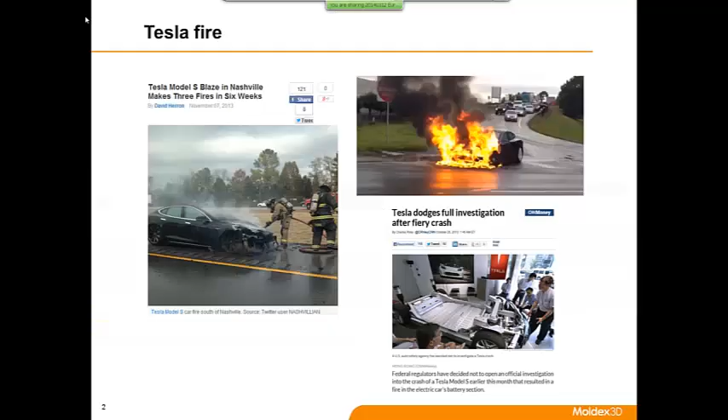So this pretty much happened at the end of last year, 2013, and we see a lot of accidents happen in this kind of advanced vehicle system, pretty much using fuel cells or batteries. So these cars are really advanced and state-of-the-art, and a lot of things are still not fully tested. Like these two fires, they happened where there's a puncture on the road.

So the falling object from the previous car just punctured through the cell module, causing the whole cell modules to heat up and cause fire. So these are a lot of things that are kind of hard to predict in advance, and to design some mechanism around that particular important area.

So above all, there is increasingly a lot of usage of plastics in this kind of vehicle due to the fuel economy constraint. So last year, we were working with GM to find out how to improve the safety of the car. This is one of the examples showing a battery module. This is the Chevy Volt, and the battery module is shown on the top right corner. On the bottom, you see a picture showing the battery frame.

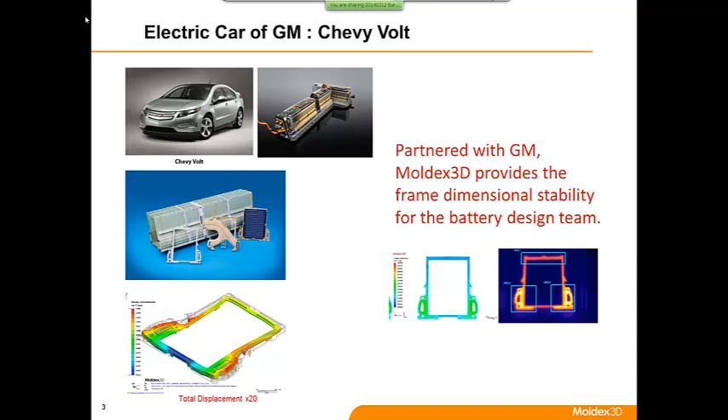This is really crucial because these areas happen to be where the coolant fluid is running through to cool down the battery module. So any deviation from the spec in dimensional stability is really important. So this is one of the benefits Moldex3D can offer in designing such crucial and advanced power systems.

So like these battery modules, when designing this kind of power system, designers have to have something in their mind beforehand. How am I going to make this kind of coolant system? Do I use plastics or metals? If I choose plastics, what might go wrong?

So for Moldex3D, what we try to do is start to evaluate this kind of design at a very early concept stage. Whether you are surveying the materials, staying with polypropylene plus glass fiber, or there might be some needs on the temperature so you have to switch to nylon, you can easily use the software to compare between the materials. What are their processing temperature range? What's their thermal stability range?

All these things can be thought about from the simulation point of view at a very early stage. So next we can move on to part engineering. There's a lot of design validation that needs to be done at this stage, starting from the concept stage. Right now a lot of structural components, under-the-hood components, and even the bumpers use a lot of fiber reinforced materials. If you have fiber involved, there are always anisotropic properties.

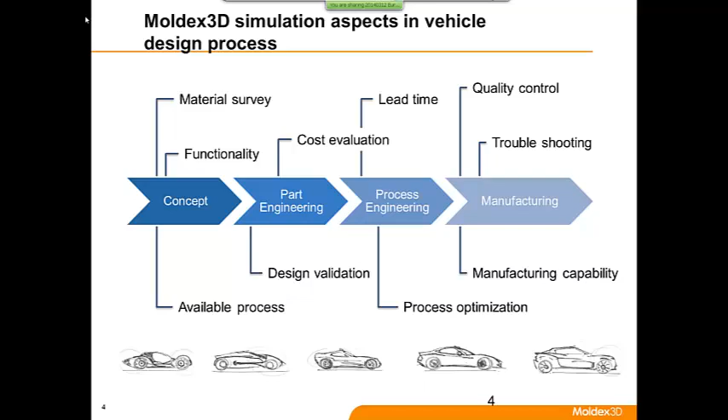So there are a lot of very realistic problems happening every day. How do I optimize the process condition? What kind of defect will I encounter? How to do troubleshooting? So Moldex3D can cover pretty much the whole range, starting from concept up to manufacturing, all the way inside this vehicle design cycle.

So in order to fit in the cycle, we partner with a lot of softwares. For the design stage, we partner with Siemens, PTC, and Dassault. So there are a lot of ways for data exchange and use of the CAD file. For example, we can have an embedded user interface directly inside this software. Also, we have other kinds of modules that can do seamless integration. So switching the data from your CAD file to Moldex3D is very easy.

Or Moldex3D can work as a standalone module. So everything you need to talk between the CAD file and Moldex3D is just a neutral file format, like an STL file. So this makes plastic processing, design and validation, and mold design very easy using Moldex3D.

So after the design stage has been done, we move to the engineering stage. So a lot of these process-induced defects or anisotropy can easily be output from Moldex3D and fed into the software. So whether you are using ANSYS, Simulia, MSC Nastran, or Marc, or Digimat, or if you want to do dynamic testing in LS-DYNA, it's all possible.

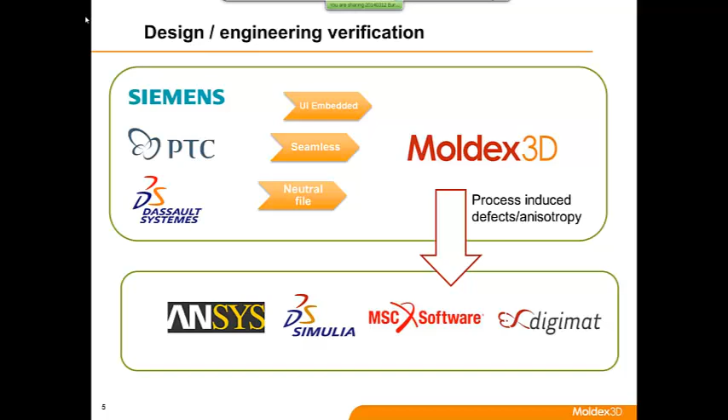And today's talk is the beginning of a series of talks. So we planned, in the following 3 months, maybe 3 consecutive talks, we will cover all these different components. So for the next talk, we will talk a little bit about interior, exterior, and optical. These components rely a lot on cost reduction and quality improvement.

And the second one, we'll be talking about body and structural. So we will see a lot of examples showing how to do structural analysis, and how to use Moldex3D's information and send it into your engineering design tools. And the third talk will be about components under the hood, or electrical components and fuel components, which relate to safety and reliability. So you will see some of the functions that Moldex3D can do to evaluate the longevity of this kind of product.

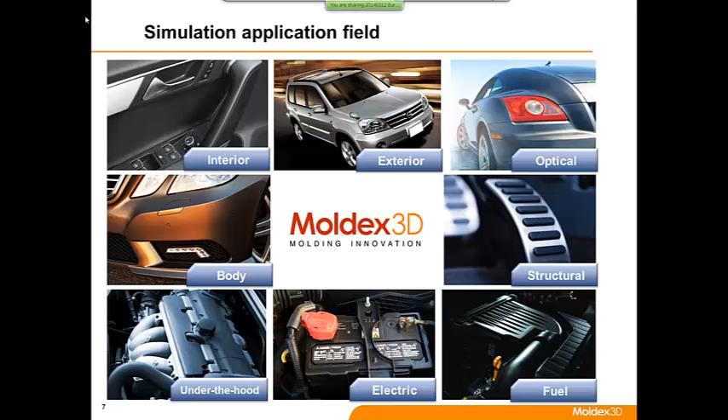So this year we pretty much grouped our modules into providing our customers different automotive solutions. So the first thing we care about is quality and cost. Later on you will see examples showing how to use Moldex3D to improve product quality. The second one is about safety and performance. And the third one is about the lightweight future.

So starting from the BMW i3, people already have a lot of knowledge about what a carbon fiber frame can do in the future, because lightweight will be the undeniable future, of course, but how to make it fast, make it feasible, what are the processes that can be done, right now people are all experimenting, OEMs are finding ways to do that. And Moldex3D is keeping up with this trend. So we also test in our software a lot of different lightweight process capabilities, so we can also have those solutions for our customers.

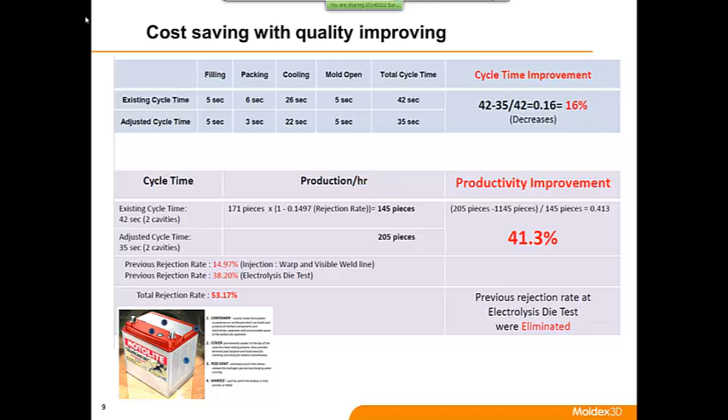And before, they even needed to spend some time and money on the electrolysis die test to see if there are any leakages because of the poor quality. But right now, since the yield is high and the quality has improved, they don't even need that test anymore. So they can dump this, so they can save even more money out of that. So from this example, you can easily see what kind of benefit mold filling simulation can do when designing or manufacturing automotive components.

So speaking of quality, there are 3 major things that people care about. It's the warpage, weld line, and sink mark. So today we won't be covering all 3 of them. We will save it for our next talk, which is sometime during April, and we will let you guys know the exact date after this seminar. But today we can take a look at how Moldex3D can deal with weld line problems.

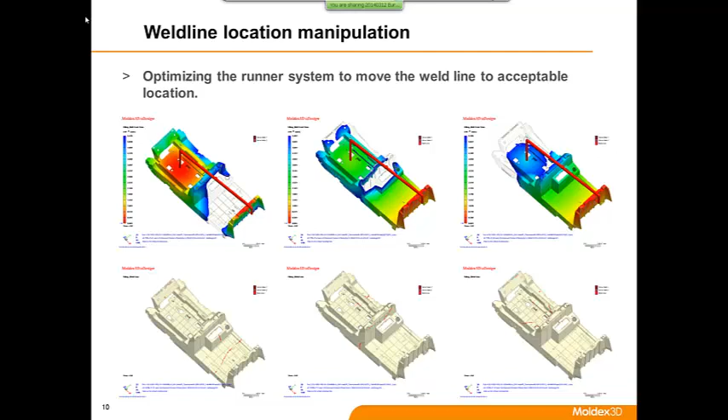And further down the road, we can even scatter this around further. So you can see from the bottom right corner, you almost see no straight consecutive line. Everything is pretty much scattered. So this benefits the structural integrity, and also benefits the appearance.

So this is another example, because sometimes in the real case the mold has been fixed, the part design has been fixed. It's limited; you cannot change too much on the gate location. So what can you do? We can still make a lot of adjustments just based on some tiny features or not so important features in the part. For example, for this handle lid, it's the back side of the part where we are doing a lot of changing, either on the boss shape or on the thickness.

And what we're trying to do basically is to change it. If you see the right side of the picture, you can see the red line and the blue line. There used to be a visible weld line near that location, but through the manipulation of the thickness and the shape of some features, we can change the speed of the red and the blue melt front advancement. So by changing that, we can move the weld line into a less visible place, and maybe by changing the welding angle, we can shorten the weld line as well.

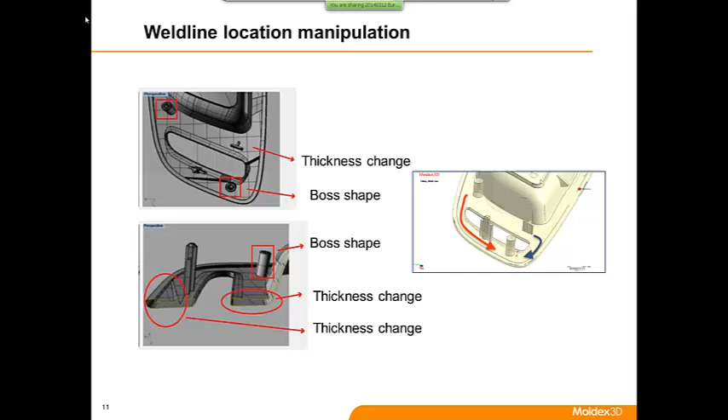So this is something you can also do even if your design has been fixed and there's not much you can do about the geometry, but still you can change some of the tiny mold features to erase the weld line.

This is another example showing that using different gates we can test the gate design. So this is a front grille, and you can see from these 4 different designs we can have a lot of different combinations of the weld lines. And not only the location, we can also estimate the weld line temperature.

So for location, of course, we want it to be in a less visible place, but if the weld line temperature is too low, it's still doing a lot of damage to the structure. But if we can also raise the weld line temperature by making the 2 melt fronts hotter than before, we still have a very strong joint in between and make them less visible.

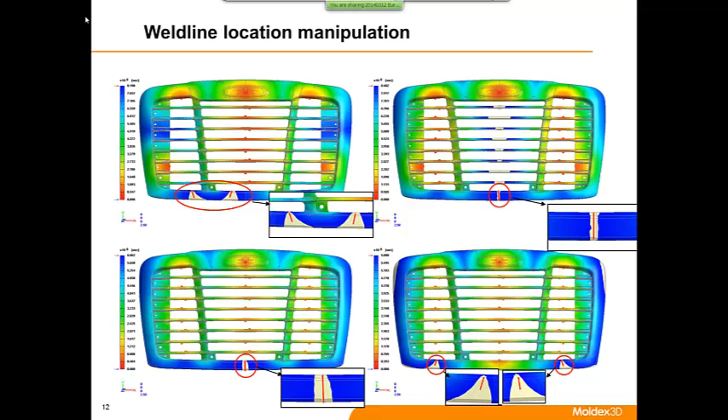So if we're using fiber, weld line location will cause another problem. So this is showing one of the examples of what Moldex3D can predict about fibers. And in Moldex3D, we are really proud of our unique fiber orientation estimation theories. So we put a lot of effort into predicting this kind of anisotropic behavior, almost really close to reality.

So you can see this melt front is coming from left and right. There's a weld line in the center. Near that weld line location, the fiber is basically not following the flow direction, but perpendicular to that. So this creates a problem.

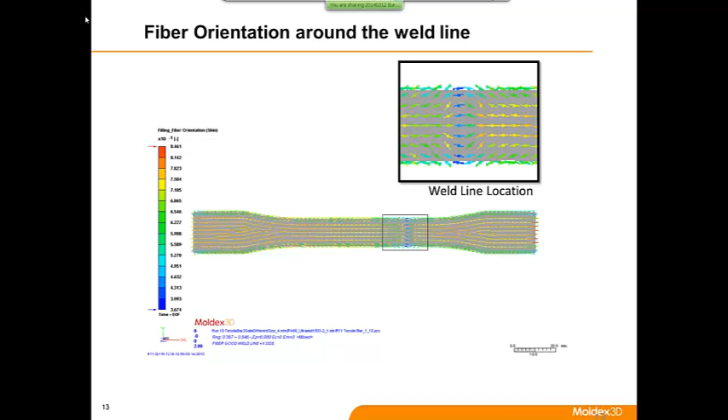For example, we can also show from this chart: the green lines, the vectors, suggest the fiber orientation. And the melt front is going from the right-hand side, passing through that circle and joins on the left-hand side. You can see the fibers align almost in parallel. So at that weld line location, no fiber is crossing the weld line. So this creates a very weak area over here. And what makes it worse is this always happens surrounding the hole.

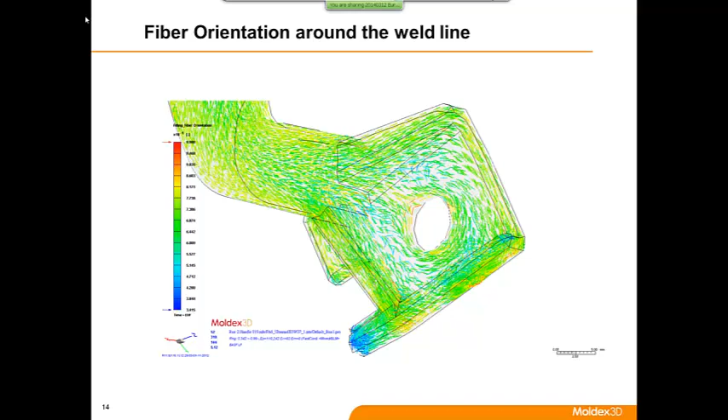So if you are doing some structural analysis, if you don't take this kind of anisotropy into consideration, you will falsely overpredict the strength of your part. But through this kind of simulation, later on you'll find out you actually did have a weak spot surrounding that circle. That's due to the fiber orientation.

So back to the tensile testing. You can see without considering the fiber orientation, which is shown on the top, the stress distribution is uniform. There's no stress concentrated region. But in reality, there's a weld line in the center, so you can see there's a really high concentrated area showing an 80 megapascal stress over that region. So we can say that without considering this kind of anisotropy, you will have limitations getting your structural simulation correct.

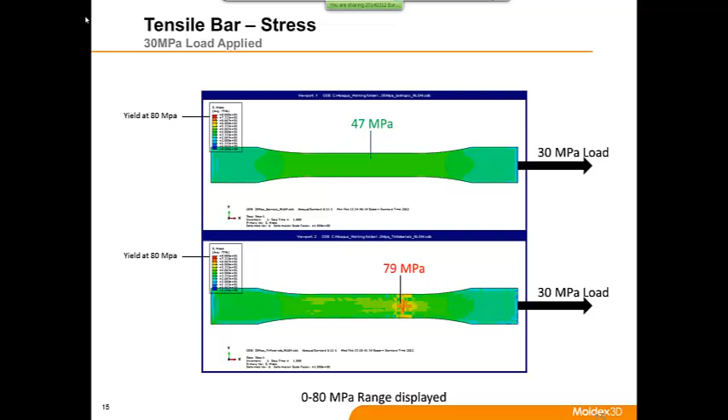So there are a lot of ways, of course, to get rid of weld lines. This is showing one of the examples that Moldex3D can predict. This is a hot runner sequential gating that's been used a lot to erase the weld line. And in Moldex3D, we have this unique feature of showing the particle tracer. So you can see on the left-hand side, this hot runner opens first. So you can follow all the particles and make estimations as it passes through your second inlet location.

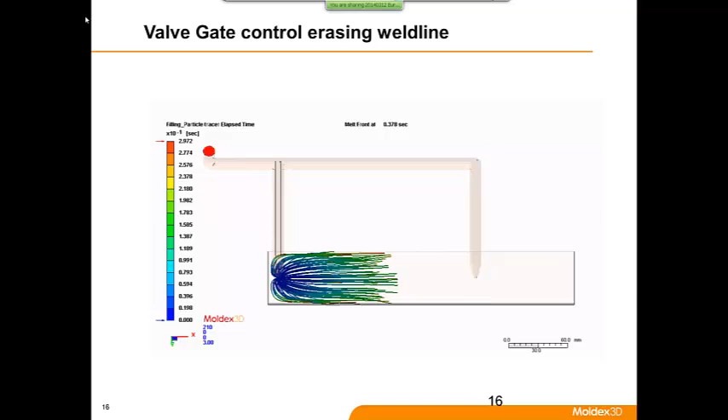So this helps the designers a lot in designing what kind of gate sequence they should use. How do I know if the first melt front has already passed the second one? Right now, of course, a lot of hot runner makers will insert a lot of sensors so they can predict when the first melt goes past the second.

But during the design stage, when designing how many hot runners you are using, do you really need a gate-controllable hot runner? So this is a very good tool, based on your geometry and your actual melt flow, to define how many hot runners and how much you're going to spend in this investment.

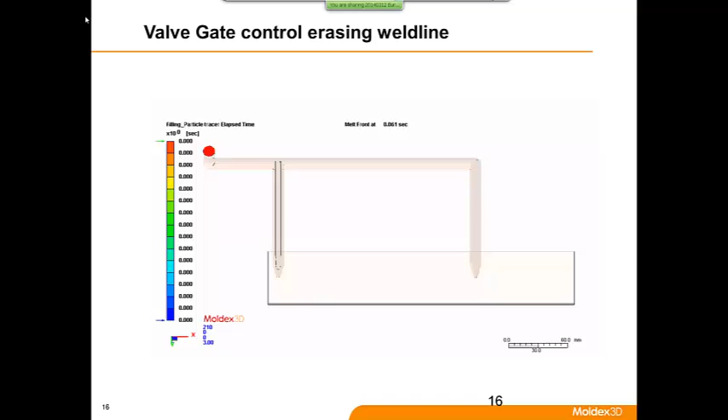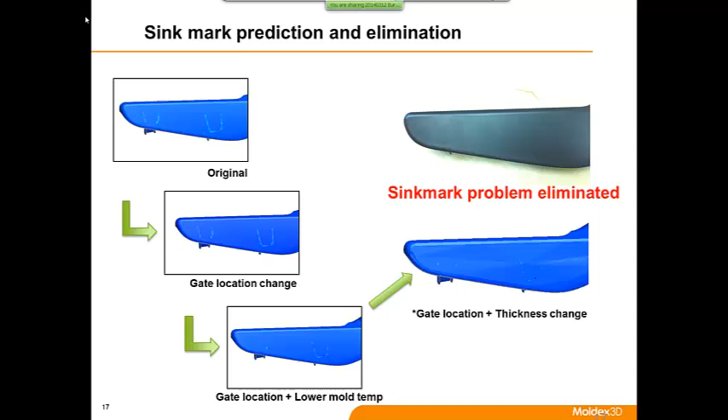Of course, when you lower the mold temperature, Moldex3D can capture that slight difference in temperature and get the estimation of the frozen layer correct. So once you lower the mold temperature, the frozen layer is thicker and the mark is not so obvious. So we can get rid of this problem. So this is in detail what Moldex3D can do to benefit these problems.

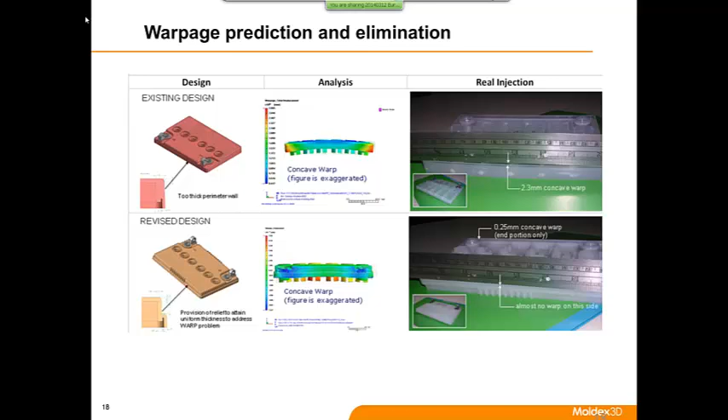So in this second phase, we'll talk about a lot of trends in the future. For example, the most important thing people all focused on is the lightweight technology. So you see, right now, a lot of things are manufactured through a lot of composite. So changing from the steel to composite, what kind of manufacturing process you want to choose, and maybe you want to even further estimate the cost of the process, the time it required to finish one part. So we will see how Moldex3D can benefit this kind of

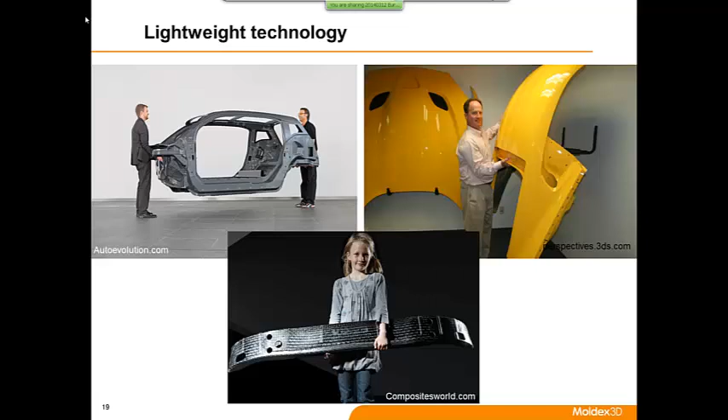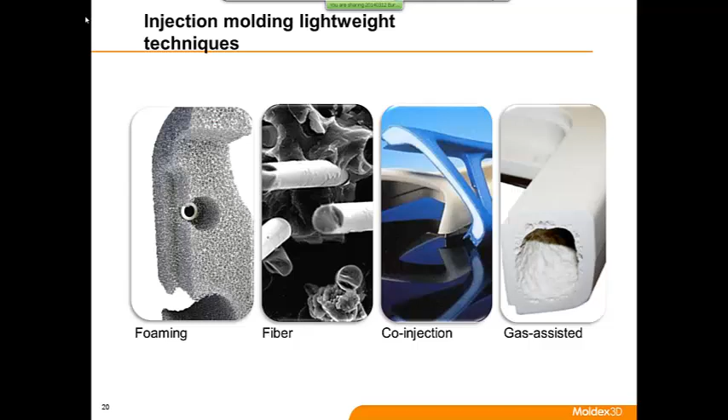technique. So in Moldex3D, for the lightweight, we have all these four pretty much really trendy techniques right now. So either chemical foaming or MuCell foaming. You have fiber reinforced. You are using co-injection, which is a combination of fiber-filled core plus a soft, more aesthetically acceptable skin. And also, you have a lot of gas-assisted applications also, especially for the car handles, that you can use when doing injection molding. So Moldex3D can support all these kinds of lightweight techniques.

So this is one of the examples of the MuCell. Right now, the technique is still very new. You have to use specialized equipment to finalize making the supercritical fluid and to inject it in your resin. But we already see a lot of applications, and Moldex3D can help you during the design stage, verification stage, and also even on the troubleshooting stage.

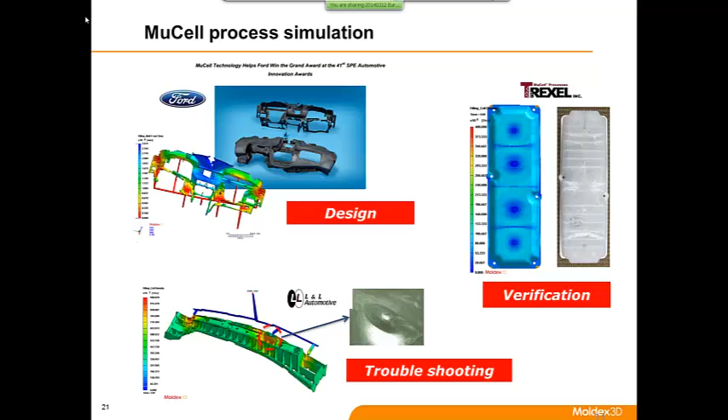For example, here you see the bubble is too big, so it's like a bump on the surface. This is from the simulation. We find out that this is due to a really high temperature causing the cells to grow too fast and causing these kinds of problems. So all these things can be simulated and validated through the software.

And during the K show last year, BASF was pretty much trying to bring out the entire complete portfolio for their fiber-filled product. For example, some are non-structural, and then with increasing length of the fiber, the structure just gets better and better. And even for some really demanding applications, you have a hybrid system between the composite and steel.

So we already acknowledge this trend, and we find our customers asking more and more and demanding us to develop tools for this kind of high-end composite design. So in Moldex3D, we also roll out a complete portfolio starting from short fiber up to long fiber, increasing up to fiber mat compression. And we even went to RTM. For example, a lot of components in the BMW i3 are made by the RTM process.

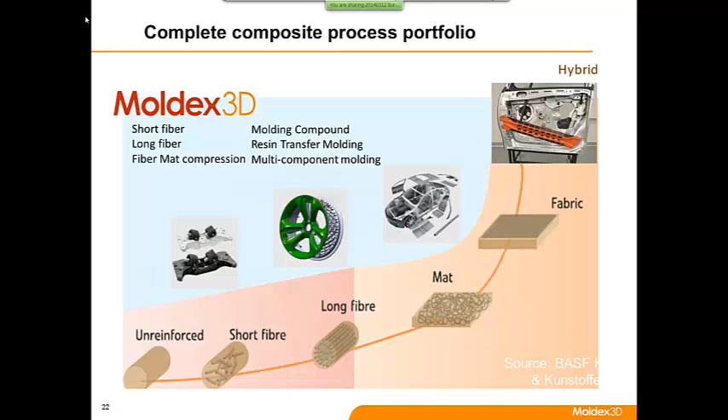So for a lot of these things, although the industry is still experimenting, we, as the largest independent mold filling simulation software in the world, need to catch up with this trend. So we are also striving to develop these kinds of tools for our users to evaluate.

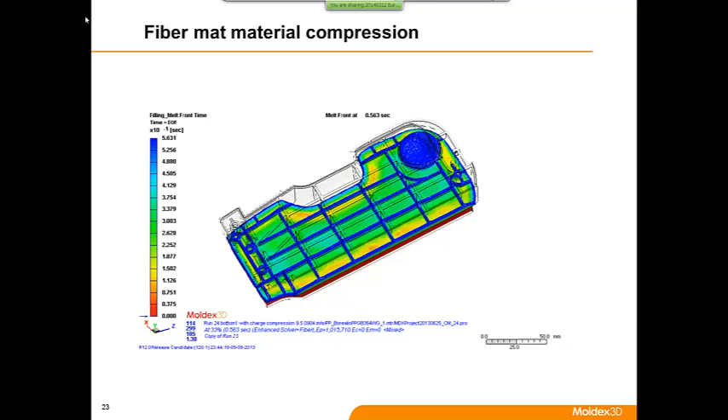And this is one of the examples showing a glass mat thermoplastic material pressed into the mold. So you can see it's not like your traditional injection molding process. Everything is compressed from the other side, and you can see how it goes into those rib regions.

And we also have the RTM module. So we can use other software as the pre-processing tool and import the fiber mat orientation, or you can define the fiber mat orientation inside our software, and we can evaluate the melt front, and you can see the animation on the bottom right corner. Because there's a guide film on the top, it flows faster on the top, then gradually sinks down through the Z direction, because in this case, the Z direction has a lower permeability. So we can also use Moldex3D to evaluate the RTM process.

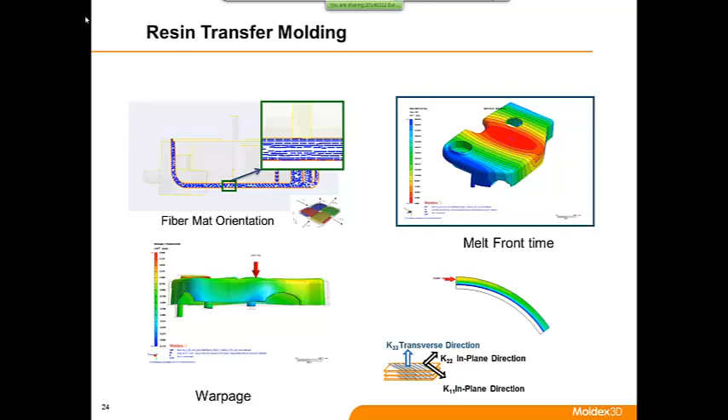And for all kinds of fiber reinforced material, we still need a way to evaluate its performance. So like I've shown before, connecting to FEA software is very crucial. But at the same time, if you want to get correct results from the FEA software, you also need this kind of process-induced anisotropy. So here is an example comparing a single isotropic material model with an anisotropic one.

So on the top one, you will overestimate the deformation. Actually, this part is already strong enough. Because you see on the bottom part, this part is injected, the melt enters from left to right. So a lot of fibers are oriented following the flow direction. So it will make the part stronger after you press it.

But if you don't consider that, you will think the part is isotropic. So in the structural simulation, the predicted deformation is higher. So if you think it's higher, you may increase the thickness and you may increase the rib structure.

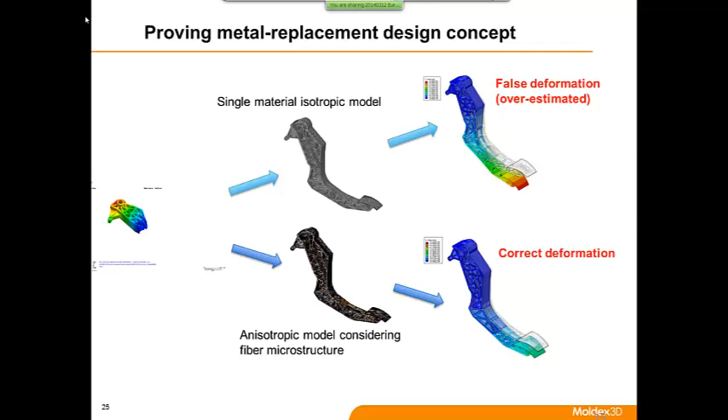You are doing over-engineering. So this is something that we don't want to happen because it wastes time and wastes materials. So Moldex3D can provide you with the most accurate microstructure and make sure that you can get better results during structural simulation. So talk about fibers.

We not only care about the orientation, we also care about the fiber length. With the increasing of the fiber length, fiber retention becomes more and more important. And also with the increasing load of the fiber. Right now, a typical fiber for nylon, pretty much you can go to 55% filled. That's a common case right now. So on this really highly concentrated system, can you always have a really homogeneous distribution of your fiber? So we can also do a concentration analysis.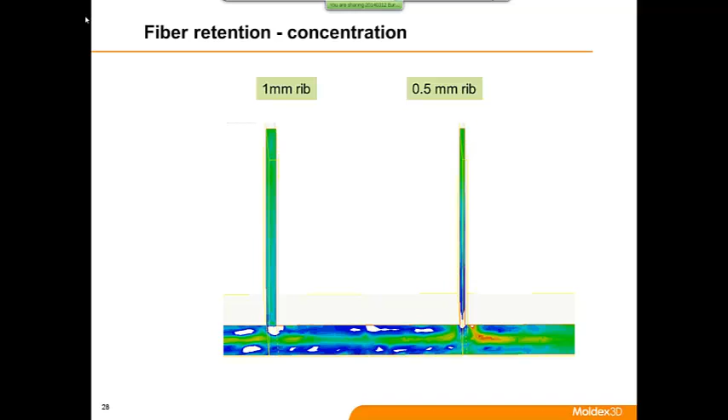But during the actual manufacturing, the workers, the technicians will always have trouble getting those fibers into those regions. That's not related to the material itself. That's not related to the process, but still it will trace back to the original design of the geometry. So that's why at the very beginning, we want to treat Moldex3D as a tool to cover the entire design cycle of the vehicle, because these kinds of problems only happen during manufacturing, but still people can use this tool to see beforehand during the design stage to take this into consideration.

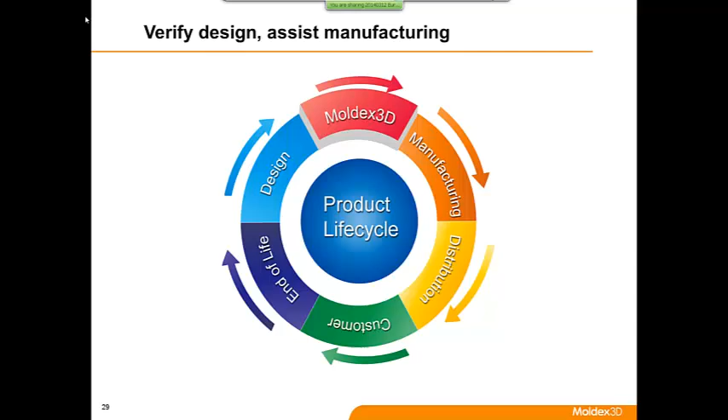So at the end, we would like to conclude that during the entire product life cycle, Moldex3D stands between the design and the manufacturing. So we want to verify the design and assist the manufacturing. Okay, so this concludes the short talk of today. I hope we can give you a very beginning tease of what we will be covering in the following 3 talks.